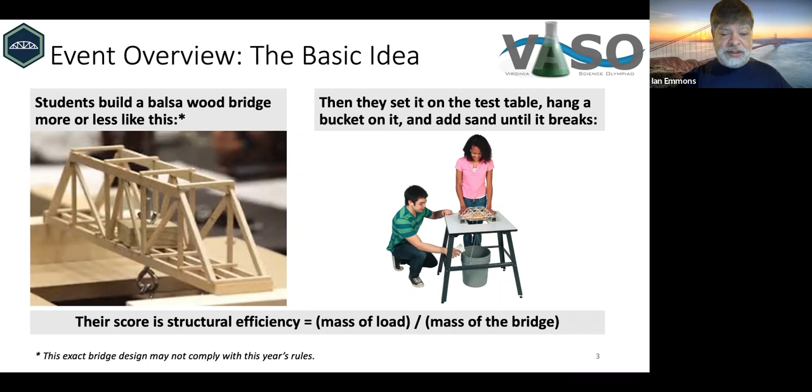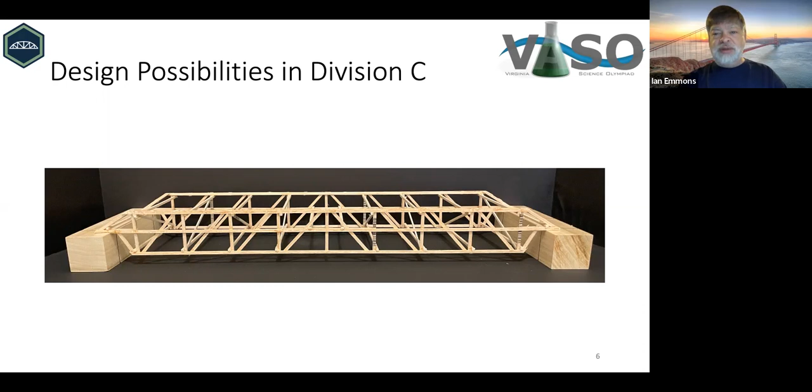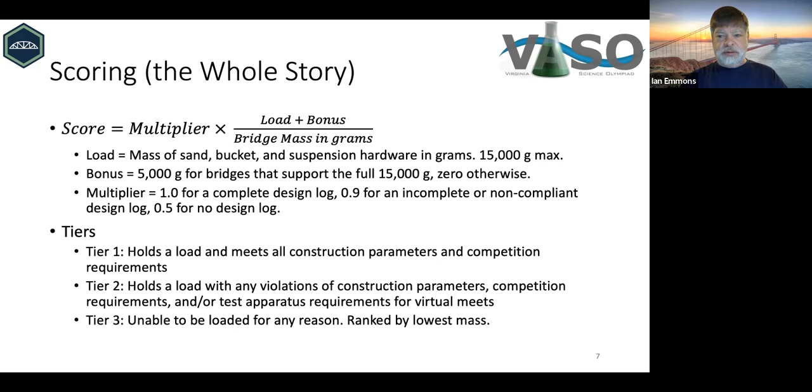I'm going to break in here. Could we go back to the pictures of the test supports? Somebody is asking, could you say the 10-centimeter requirement again in B? I think this is a B bridge coach asking. They want to know if the 10-centimeter requirement is about width, right?

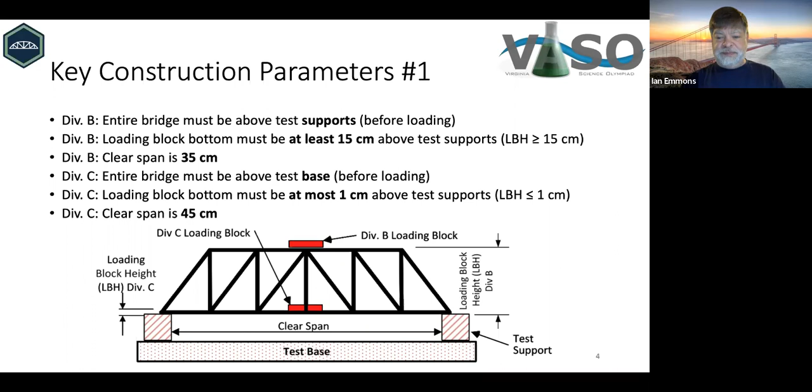All right, and just confirming, could you go back one more? In Division B, the loading block has to be 15 centimeters high, right? Higher than the test support. Right, so we have somebody conflating the two requirements. The 10 centimeters is about width, and the 15 centimeters in Division B is about height. Thanks, okay, let's move on.

Okay, so that was our scoring. Now let's talk a little bit about how you get started in actual construction.

It's designed 100%, and you can just take those plans and use them to build a bridge. This is great for a first try. It's likely not a winning design because, of course, everybody has this design, so you're going to have to do better than this to win, but it's a great place to start.

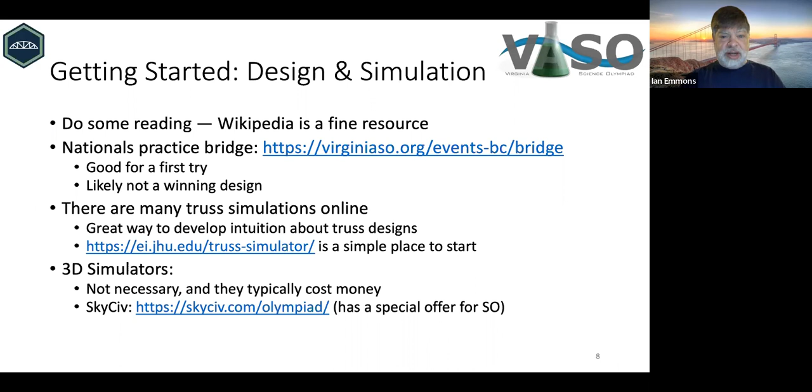What this is really good for is building your intuition about how trusses work and what different truss designs do for you. You can quickly draw many different trusses, test them out, and see how they do and how they differ. That will help you develop an intuition about designing a truss.

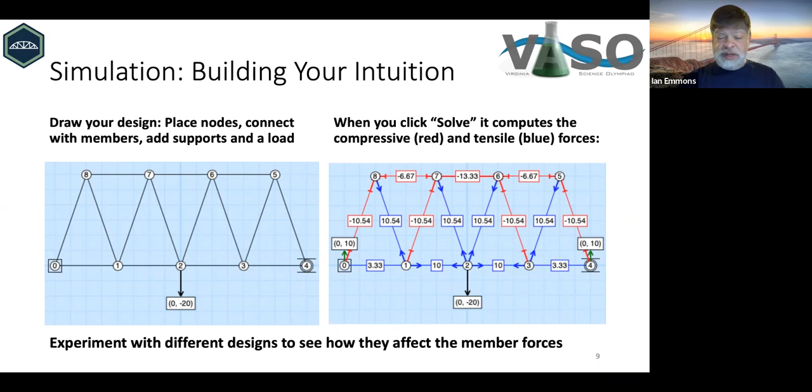So, we can move on here. Limitations of simulators: it's a good idea to use a simulator for a little bit to build up your intuition, but you don't want to spend a lot of time in a simulator because they have some limitations. The chief one is that they don't give you practice in construction, and this is really crucial. At the end of the day, you have to actually build a bridge, and accurately cutting and making strong glue joints are nearly as important as the bridge design in the strength of your bridge. There's no way to get good at this except with hands-on practice. So you want to move out of the simulator and start building bridges fairly quickly.

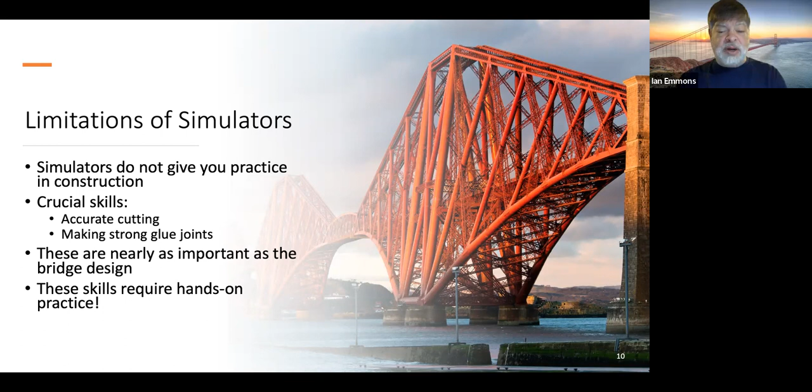So before we talk about how we actually build the bridge, let's talk about the materials you're going to use. You're only allowed to use two materials, wood and glue. With respect to the wood, I would recommend that you just use balsa wood. There are lots of kinds of wood out there, of course, but we've found over the years that other kinds don't really work as well.

You can find balsa wood online. You can also buy it in a hobby shop, AC Moore, or Michaels. I actually like to go to a hobby shop and pick out my own pieces so I can pick the straight pieces and the pieces that don't have flaws in them. But lots of people buy it online.

There are a few extra requirements here. You may not use bamboo or reeds—those are technically not wood, they're actually grass. And you may not use commercially made composites like plywood, particle board, MDF, and so on.

You can make your own plywood. You can take several pieces of plain wood and glue them together in layers, and that's what plywood is. That process is called lamination, and you may do that yourself—you just may not buy the wood already laminated as plywood.

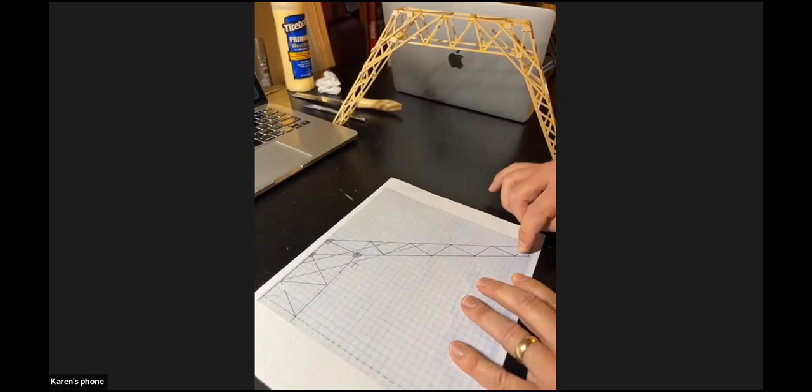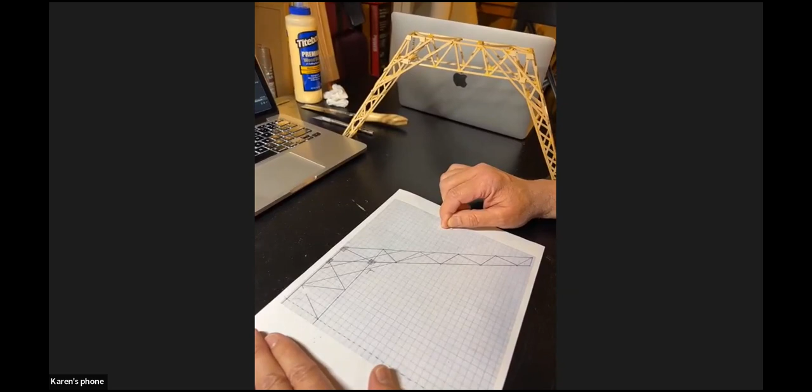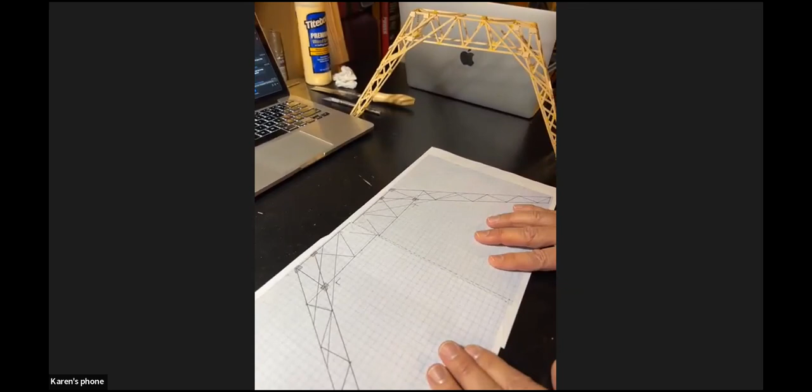Now, you'll notice that I've only drawn half of a bridge here. The reason for that is there's a cute shortcut you can take where you draw half your bridge and then scan it to turn it into a picture in your computer. Then you make a copy of the picture that you flip the other way—graphics programs always have that function. Then you print each one and paste them together, and you get a whole bridge for half the effort, with the two sides matching exactly. That's a nifty little shortcut.

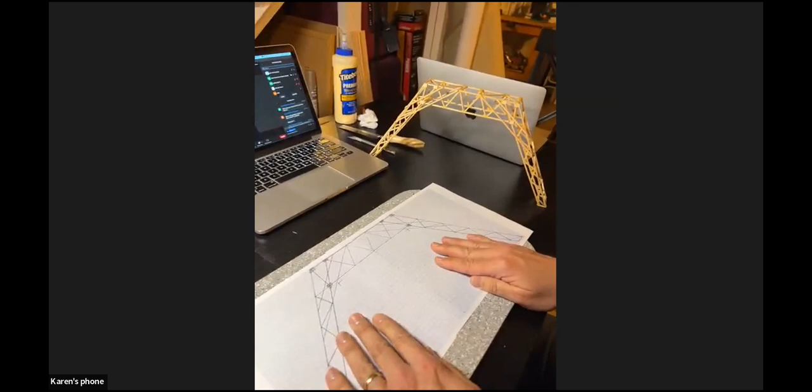So once you've got your plans drawn, I use a small bulletin board like this, and I put that on my table. Then I take my plans and lay them on top, taking a little bit of care to line up the two halves so that they're aligned with each other, just so. Then I take a piece of wax paper and lay that on top, which prevents glue from getting on my plans. And then I'm going to take some pins—spill myself a few pins here.

And I'm just going to stick a couple pins in the overlapping section to keep the plans in place, and a couple out here so things don't move around on me.

This wax paper is nice because you're able to reuse the plans if you decide it was a good design. Also, somebody asked what goes in the design log, and plans can be a part of that. Check the rules to see what goes in there, but this is a good resource.

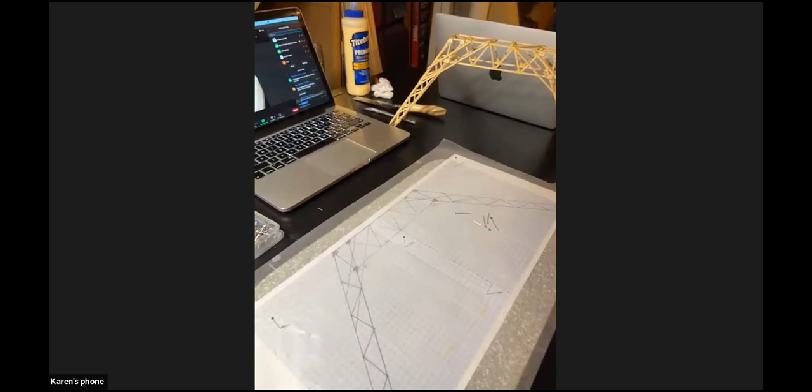So now I'm going to get some balsa wood here, and what you're going to do is pick one of the members, lay the balsa wood right up alongside it like so, and then cut it.

Typically we use an X-Acto knife like this. That's a good tool to use to cut it, and you can just cut right on top of the diagram so you get it exactly the right size.

I'll say, this is thin balsa wood. If you're using thicker balsa wood, it's often a good idea to get this tool, which you can buy at the same place you get X-Acto knives. It's a saw, very fine tooth, small saw, and that's good for thicker balsa wood because it doesn't crush the wood and weaken it.

But once you cut it—I'll interject here that both of these tools are very safe for students of all ages to use, but if you have young ones, you can go ahead and watch them the first time.

So I'm not going to actually cut my wood because I don't want to end up with a whole bunch of little scraps that I throw away.

But once you've cut it, you lay it right on the line where you want it to be, and then I'm going to pin it. You'll notice I'm not putting the pins through the wood because that weakens it. I put pins in pairs, one on either side, to hold that wood down.

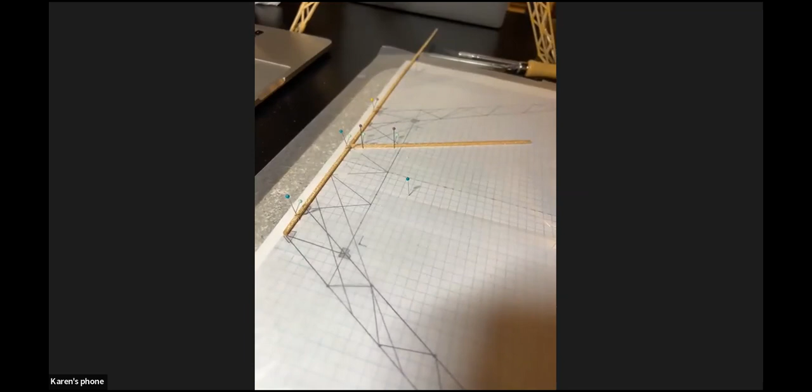So you can imagine, if I were to take the time to do this out, I would end up with pieces of wood on all these lines, and it would look like a hedgehog with all the pins sticking out of it. You would allow the glue to dry, then take all the pins out, and since the glue won't stick to the wax paper, the truss will just come off in one piece.

This is really nice too, because now you're going to have to do it twice to make two identical sides of the bridge, and then the sides will be identical. Right, because you're using the same plans each time. So you would do the whole thing a second time to make the second truss, which is the other side of the bridge. And now, just a few words about putting those two together.

This is actually a bit of a tricky part of building the bridge, but you can imagine, I've got the truss on this side and the truss on that side. One method that works fairly well is to use something like bookends, or some largish heavy object, one on each side, that will stand up straight, and then you can put the two trusses up against them, maybe use a little double-sided tape or some string to tie them on there, and then you can put all of the cross pieces in, and glue those together.

That's a little bit tricky to get the two sides assembled like that, but it kind of depends on what objects you've got at home that you can use to hold the trusses up. You also just get better at it with practice, I think, as well. Very much so. This is one of the trickiest pieces, is making the two sides match up. Right. Otherwise, the stresses are not as solid on the bridge. Yes, that is, or even, yeah.